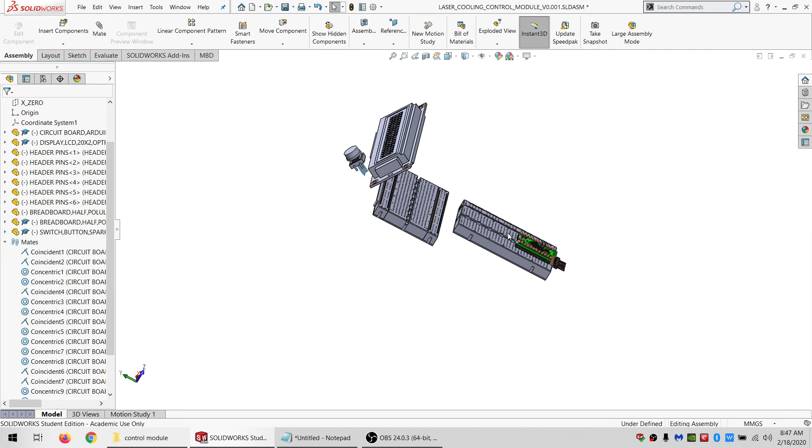I'm in the process of adding active phase change cooling to it, and that involves a whole bunch of extra sensors and readings I need to display. So I'm going to make a module to go on top of the machine that will give me all those readings, and it'll have a few buttons so I can control the menus.

I've already thrown in basically the parts that I want. These are breadboards, and this one is missing one side because I only need the one terminal strip. This one I'll do the same, and I designed this part in a previous video, so I can say I want just the J side, which removes that. So I've got two solderless breadboards.

And I've got an Arduino Pro Mini here. That is not an endorsement of this product, it's just that I have one laying around and want to get rid of it. It's hard to find a use for it, so here's the use for it.

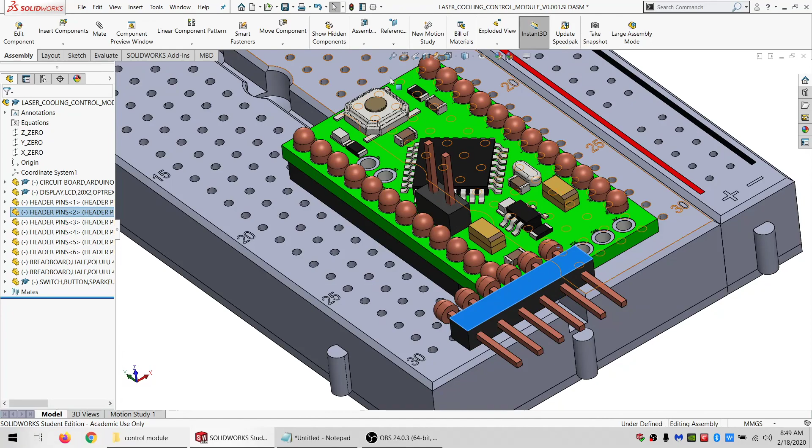I've got some header pins. Most of these are just concentric mates, so there's not much to it - I went ahead and did those before I started the video. This last thing though, normally I would design a 90-degree header for this, which I should probably do at some point. But the board I'm using is actually pretty old, and it uses an oddball 90-degree header that doesn't really match with what I've got, or what pretty much anyone has.

So I'm going to draw this in, show you how I made something like this into something like this. How I'm going to do that is I'm not going to edit this component, I'm just going to put a sketch on it.

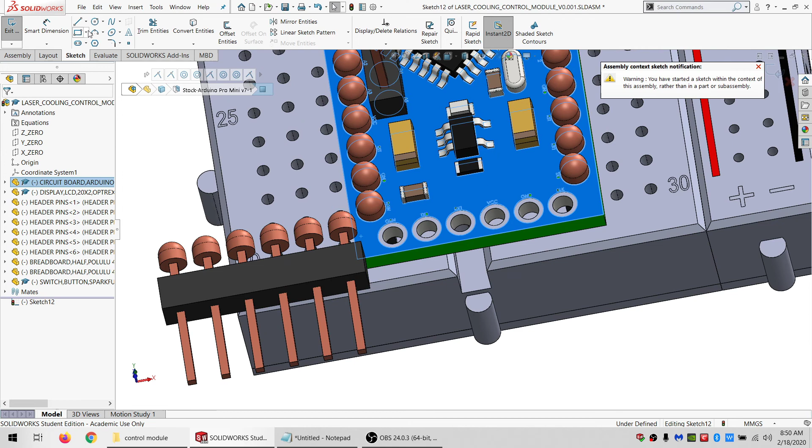I'm going to do a center rectangle here. I'm going to say this is equal to that, just because we want it fully defined. And look, this is a 0.62 width pin.

So we got that - select the point, select the face. No, we need to get out of the sketch first. So we want to mate using the face and the point. And that'll be kind of a slow update, but you hit Control Q and it updates.

In addition, we've got a button - there's actually going to be 3 buttons, but at this point it's easier to only have the one there. And we've got a character display, which is 20 characters across and 2 rows.

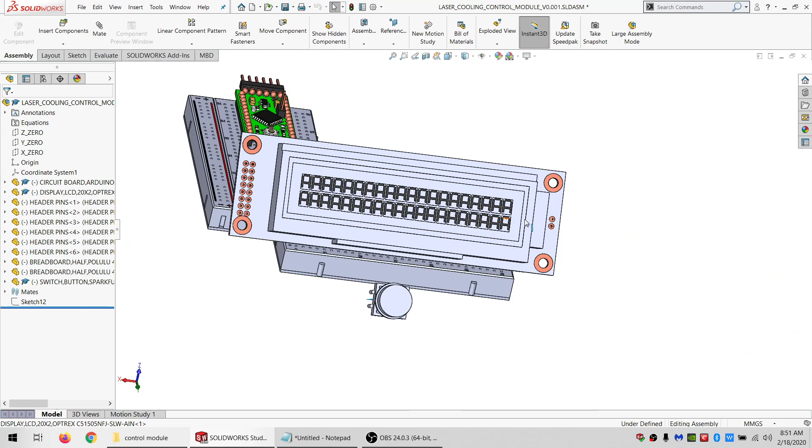So, best get started, basically mating all this stuff in space. I already have a couple of planes here to make it easier to set up, so I'm going to mate that so it's mated center.

And I'm going to go onto the Z0 plane, and actually I'll go ahead and make a couple mates right away on that.

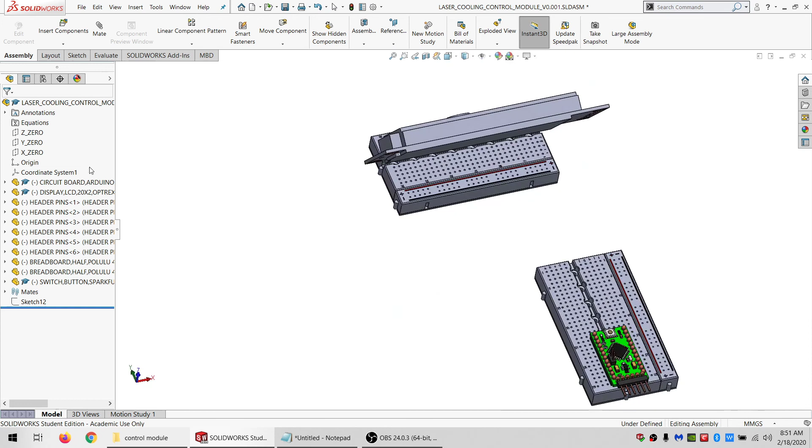So go on the Z0 plane and do another sketch. Just going to draw a rectangle real quick, do a midpoint with the origin. I took some measurements, so this needs to be 170 millimeters wide.

And there's going to be an access hole going into the bottom of it, which is 30 millimeters diameter, and it is centered 96 millimeters from the front, for construction.

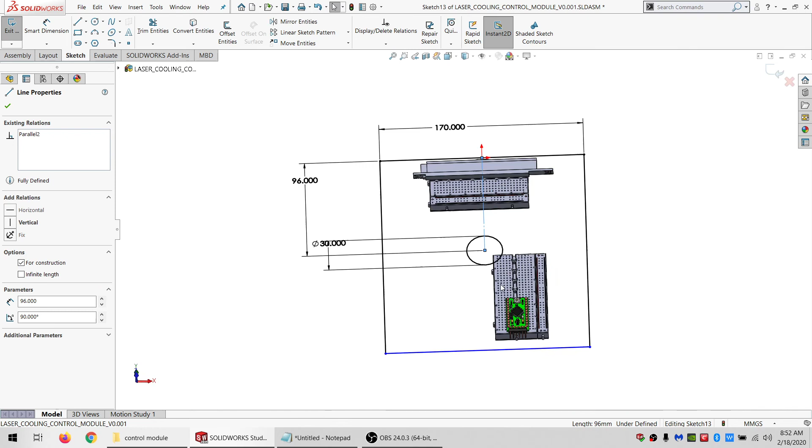And then, excuse me, we have this - we already have. Basically I want to start by figuring out how they're going left to right, then forward to back after that. So, see how wide this is.

So that is 82.1. I'm going to do a center rectangle, make it 82.1, and measure this way. Oh, that's 44.

And I'll just go tangent with this access hole, so it's not blocking it, but it's right up against the edge of it.

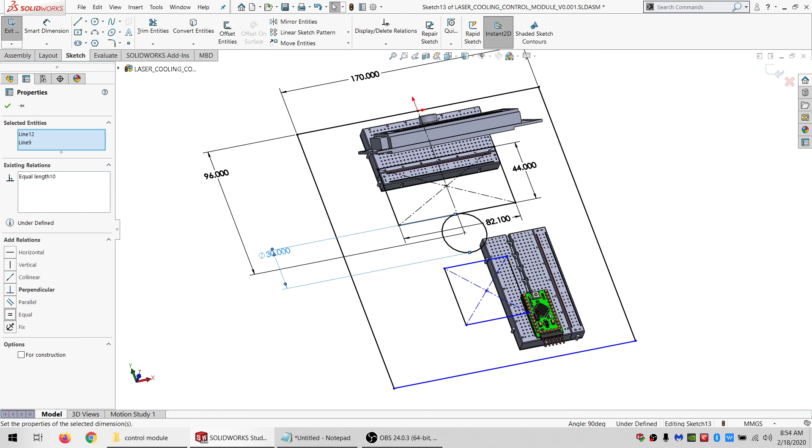And this is going to be the same as that, just rotated. So I want a center rectangle. Even though it's down here, I can still do a coincident with this line. Let's say this is equal to that, and this is equal to that, and this is tangent with that, and then that's locked down.

So based on that sketch, I'm going to go ahead and place a couple of mates in. So I'm going to click here and here, and here and here, and here and here.

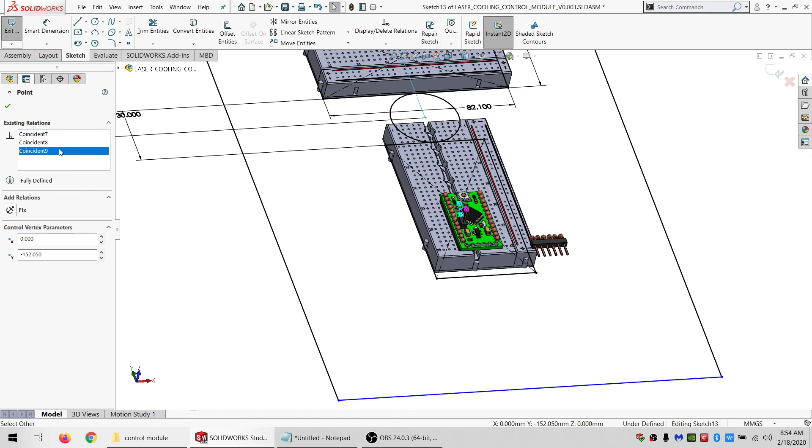Actually that's not quite right. So this, I actually don't want this to be centered, this rectangle, because I want this connector to be centered.

So let's make a little modification here, and let's see. I can't directly control this because it's already controlled by another sketch. What I can do is get out of here, do Control Q twice just to be sure, and then measure from here to here - it's 11.19.

Oh, I want to edit this sketch, and make a new thing, or let's see, 11.19 from the edge.

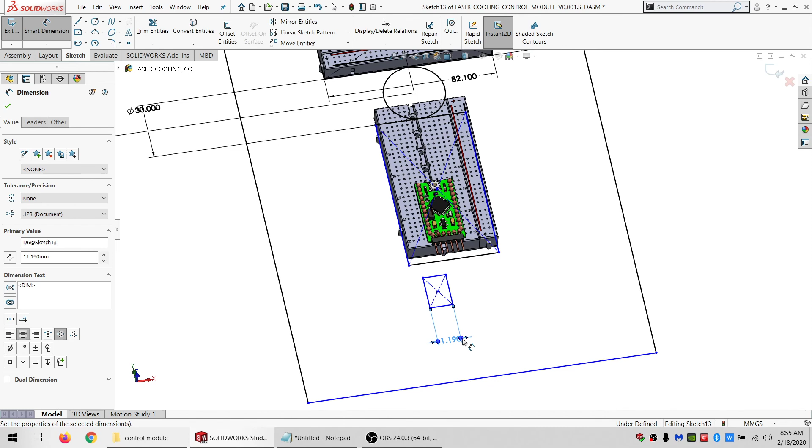And then make another rectangle, 15.2. Put coincident on that. And put a coincident on that. And go ahead and make these equal just for good measure.

It doesn't really matter where these are, but I do want them dimensioned at least so they're not floating around. And I'll do an equal there as well. So then this should be the edge of that. That should center it.

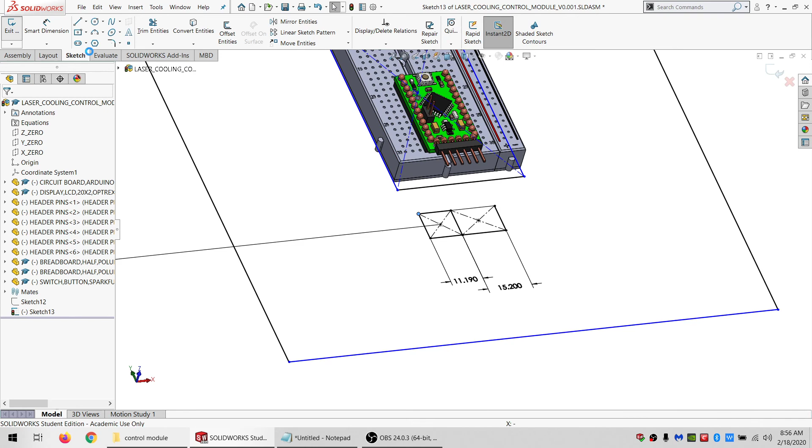And still want this to be there. Let's see, use this plane as a parallel. And do a Control Q real quick.

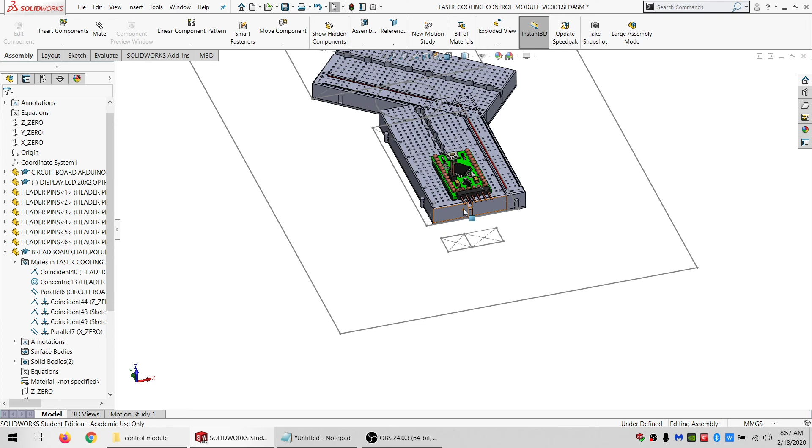So it's not happy about one of those constraints. Get rid of that old constraint, and it should be good. Do another Control Q just to be sure.

So that breadboard needs one more thing constraining it. So I can go from here to here and do a mate. So that one's locked down.

So now the only thing that's not locked down are the display and the switch. Before we go any further, I just want to double check that we take our center to there, 7.6. We take our center to there, 7.6. So that worked at least.

Next, before we can position this, we kind of need to add another feature of sorts. It's going to be a new part. It's actually not going to be made. I'll give it a name right away. Let's call it Keep Out.

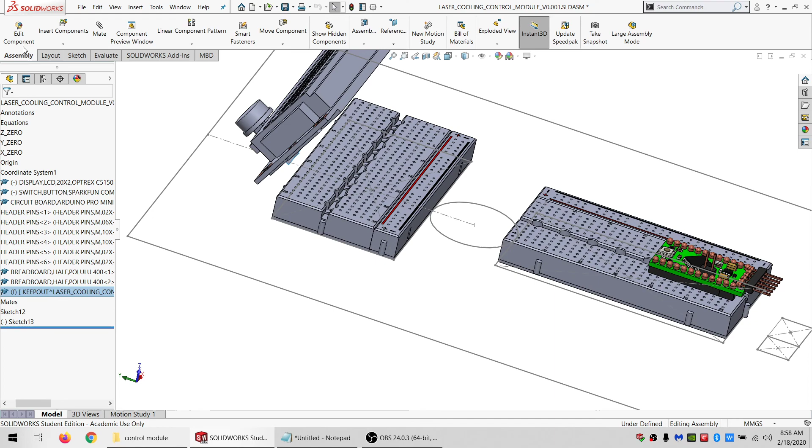And this is the area where I want to avoid putting anything because it might get in the way of components that plug into these boards. Because I don't necessarily know what components will be plugging into these boards in the future, because if I knew that, I could just make soldered circuit boards and be done, but things change.

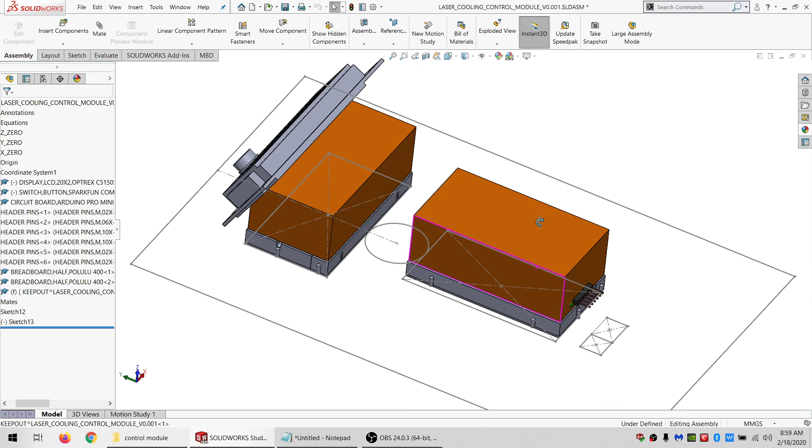So basically just cover the whole board, do an extrude, give it a color, so that's nice and easy to notice. And there we go.

And then I'm gonna put a mate on this display to set its angle of, no, I want an angle of 30 degrees. Basically this will be right up against the back of a piece of acrylic, and so will this part of the button, so might as well get those done right away.

And then this has a plane right here, and this has a plane right here. I'm going to mate those up so that's centered.

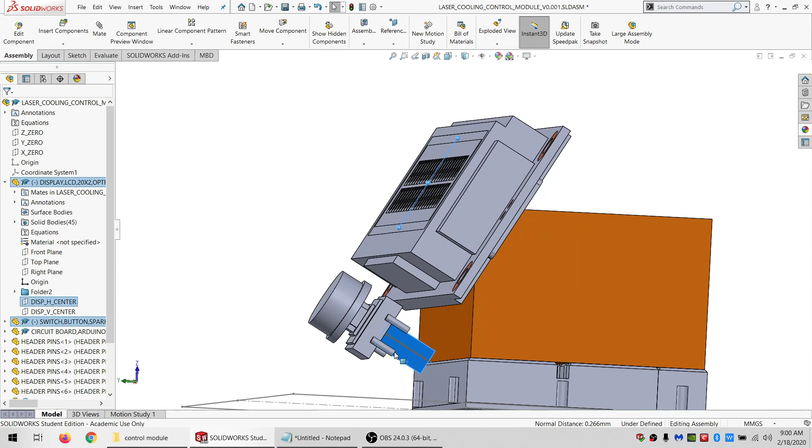And I'm actually going to modify this a little bit, because I'm going to have to give up a little bit of space if I want this thing to be remotely compact. Basically the back half of this breadboard I'll focus on. If I need taller components, I'll put it in the back half. Shorter ones would be in the front half.

And put that to the midpoint then. Do an extruded cut through all. And close that. So then that gives me a little bit more clearance room there.

And this positioning of this button is going to be tricky. It's probably going to be like one of the last things I do. But I do want to make sure that it's at least a good distance away from here.

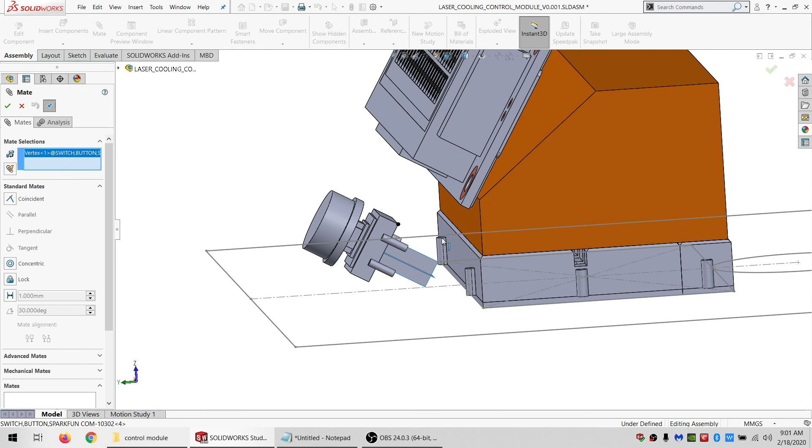I already had some selected. So I'm going to mate like that. Give it a distance of, say, probably need at least 12 bare minimum.

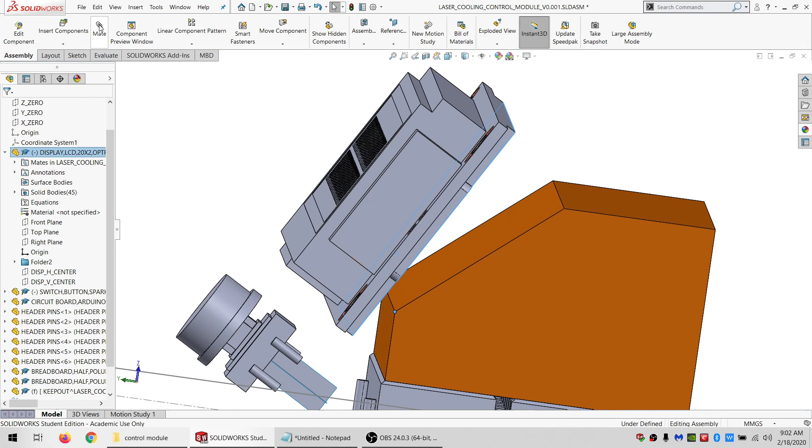So this can still move up and down, and that'll be something I have to figure out later, but I want at least a little bit of safety margin there. And then this can move up and down as well, or forward and back. So what if we put a constraint there?

Then it can kind of slide, but that's its last degree of freedom. And this is apparently fully defined. And that's no good, that's way too low. A bit too low, so I'm going to get rid of that mate.

So that we can actually have that high enough. And you want the bottom of this to be clear of the bottom here by, figure, at least 10 millimeters. Which will probably lock this down entirely. And that is fine being as a fix.

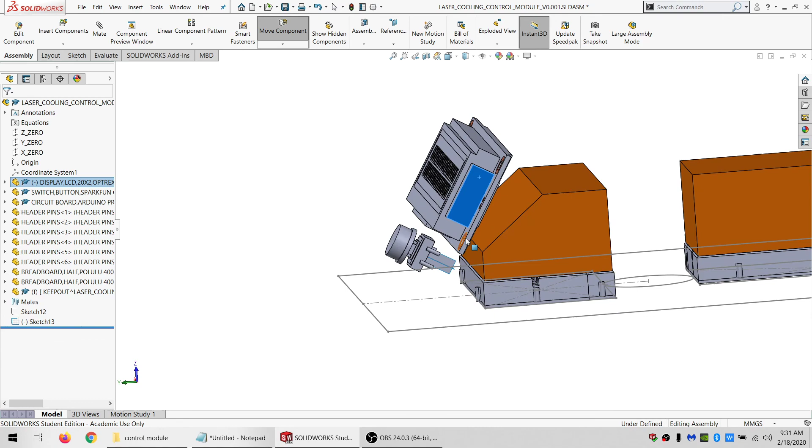So then this is the only thing that's still really moving freely. And I need to think of how I want to deal with that. I think if I put a sketch on here

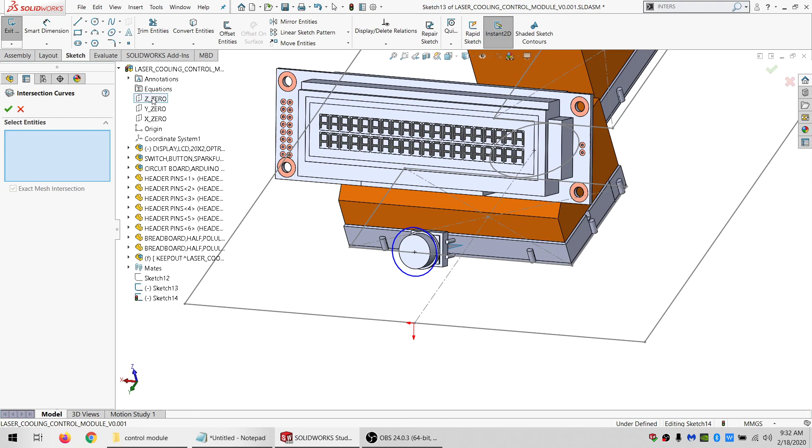And make those concentric, and I make, well, let's do an intersection curve. Oh wait, I don't have intersection curve there. Okay, it does not want to do an intersection curve, fair enough.

Let's draw a line. It really does not want to cooperate. At all. Alright. So how to deal with that? Seems like every method it's blocking me. Right.

That's not going to work either. Alright, let's put a sketch down here. Or actually, let's edit this sketch. No reason to add extra stuff.

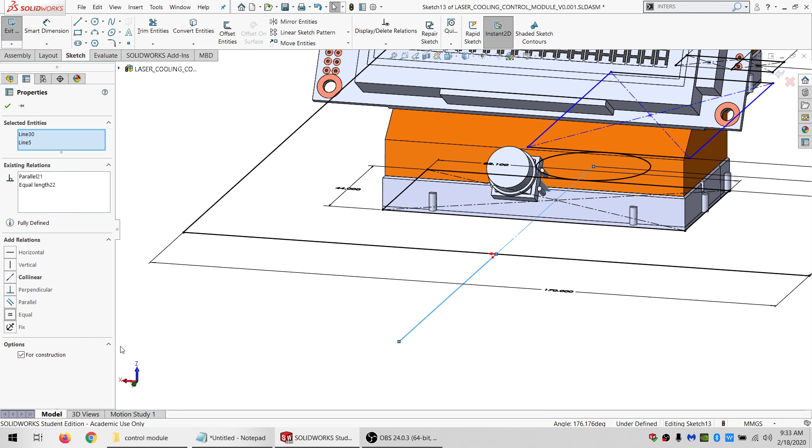These parallel and equal. Make this for construction. And edit this sketch again. Put a point and make it pierce, so that point is finally set. And this be horizontal. Alright, so that gets me what I've been trying to get.

Do a tangent. And... alright.

And then I want, let's see, this is the part that will actually be lit up. So that's the only part that's actually going to be seen through the screen. So that's the part that I want to mate to.

And do a Ctrl+Q. And everything is in its place. So I'm going to hit save. And looks like we're clear there. We're clear there. Alright.

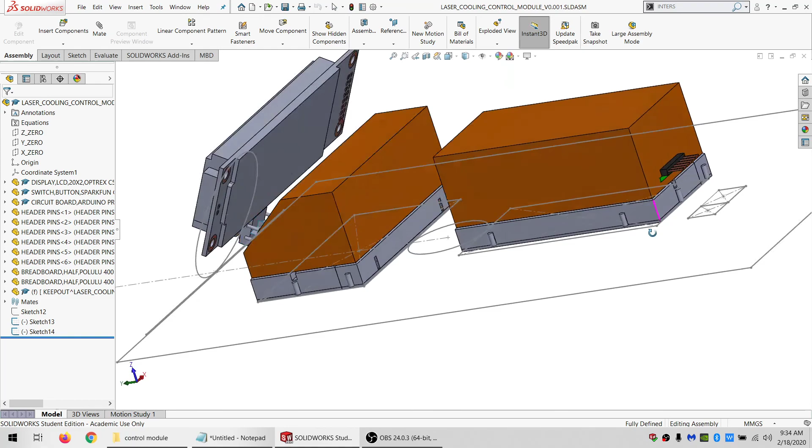So then I'm going to put in a new part again. And I'm going to select that part and click, actually, before I do anything with it, I'm going to float it, grab the origin, the assembly origin, and mate those together, since I don't like fixed parts when I don't have to have them fixed.

So edit this component. And we need to start putting in, basically I just want some surface bodies, and I can work from there. I'm going to sketch on here and just draw a rectangle.

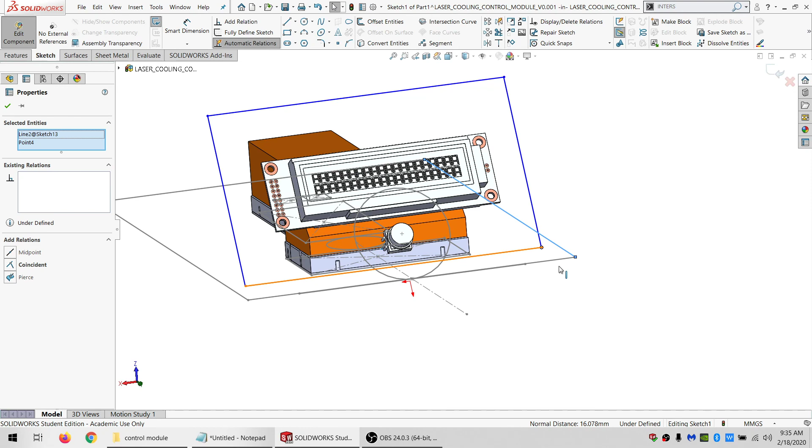Say it's, well, I'm going to make these surfaces a lot bigger than they actually need to be. So grab that, put a point here, not a midpoint, because I want it to be able to slide easily. Pierce that as well.

Yeah, way bigger than it actually needs to be. I think that's fine, just kind of guide surfaces. So, and then grab a planar surface.

And let's see, let's edit the sketch again. Just add that circle and that rectangle. So I've got those holes there.

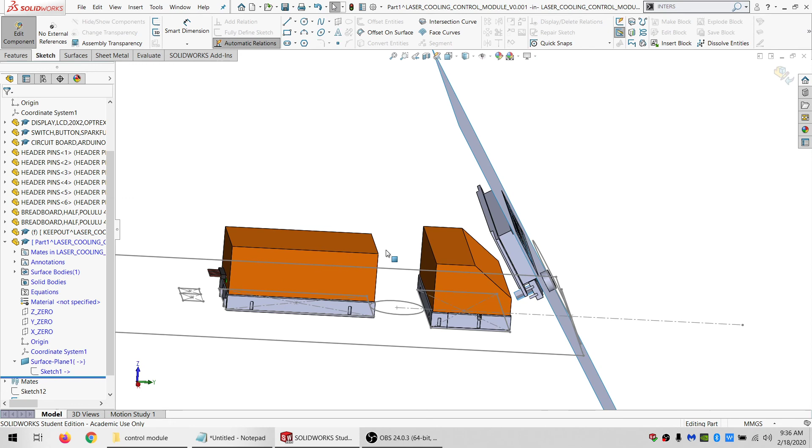And let's see, we need bottom, sides, back, all that good stuff. So draw on the Z0. And just basically copy this rectangle. Make another planar surface.

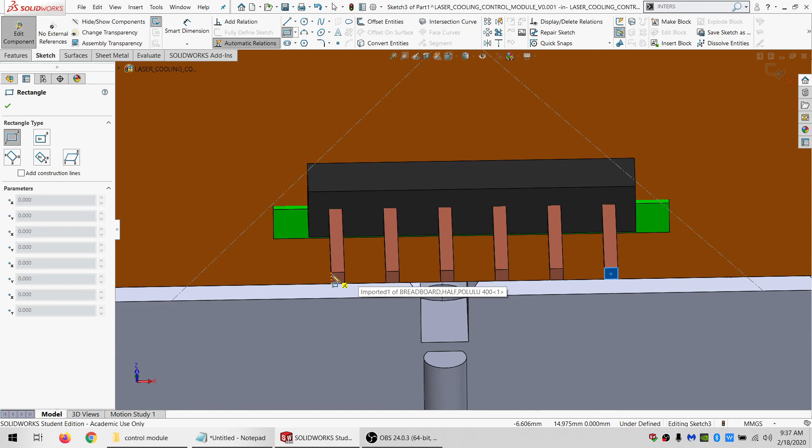Alright. And then back here, I'm going to draw right on there. Sketch. And first of all, I'm going to convert this hole back here, or this rectangle.

Do it for construction. Offset it by 4, I think. Gives me plenty of room to work with, because I want to put a fillet of 2 on there.

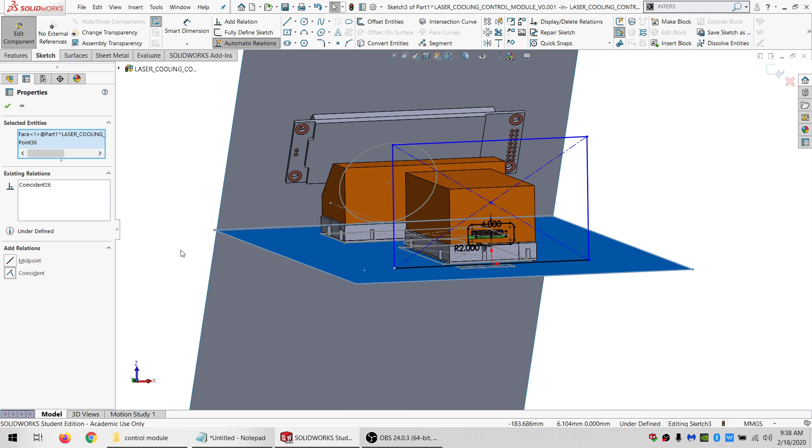And then I need an actual bona fide rectangle. So grab that plane so I can center it. And I can go onto this face.

Then the height and width are kind of mysterious so far. So we'll just make them bigger than they need to be and deal with trimming them later. So, planar again. Alright.

And now I want to make an actual plane. And it's going to be going between here and the highest point, which I believe is here. I'm not sure if that hits. Nope, it doesn't quite hit. Alright, so draw that plane in.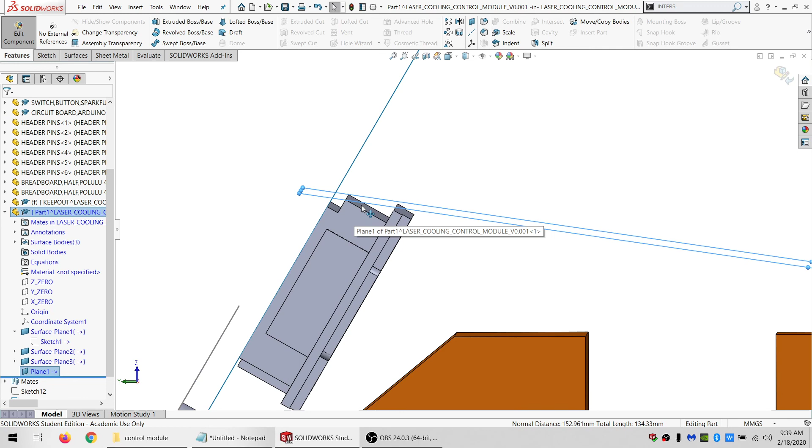And want a little bit of, well, do I want a little bit of space there? Yeah, I think I am going to want some space there. And the reason is, actually, let me get rid of this plane. The reason I'm probably going to want some space is I've got these letters, and it's going to be something like this.

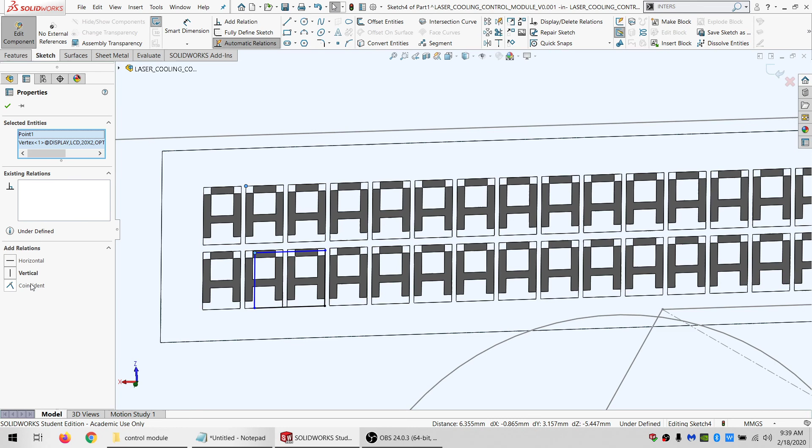Well, basically I'm going to have a bunch of little sections of this display, and they need to be labeled. Let's draw one in for now. And so it needs to come outside of the display area. Then I want a little bit of a safe distance. So do coincident to the edge of the display area.

These are both, these are all parallel. And I want, say, 2 millimeters of clearance. Then I want a couple of rectangles. And I want that midpoint. Do a midpoint to midpoint and make it parallel here. Parallel.

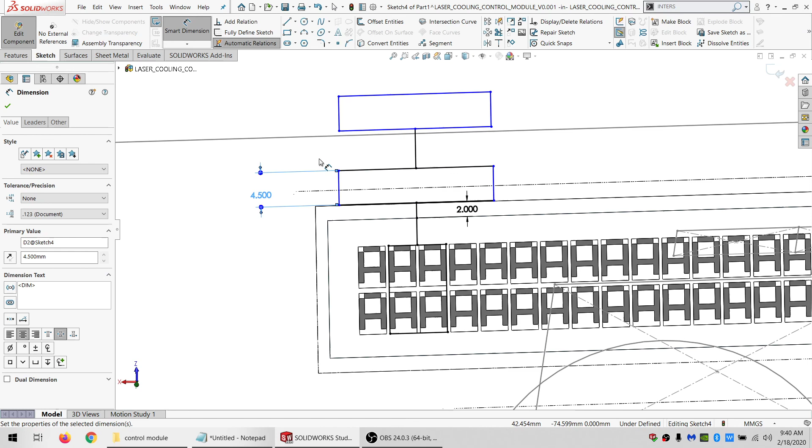And I want it to be, the text is going to be 4.5 high. And because it's about as small as I can get away with while it's still visible from a distance, from a little bit of distance at least. And that means that I'm going to want about a third of that, so that much spacing. So I need that much room above. Let me double check that I've got that much room below as well.

So make these all parallel with that. Make these equal. A couple of rectangles. Go midpoint, and midpoint to midpoint. Make these parallel and equal. Make these equal and these equal.

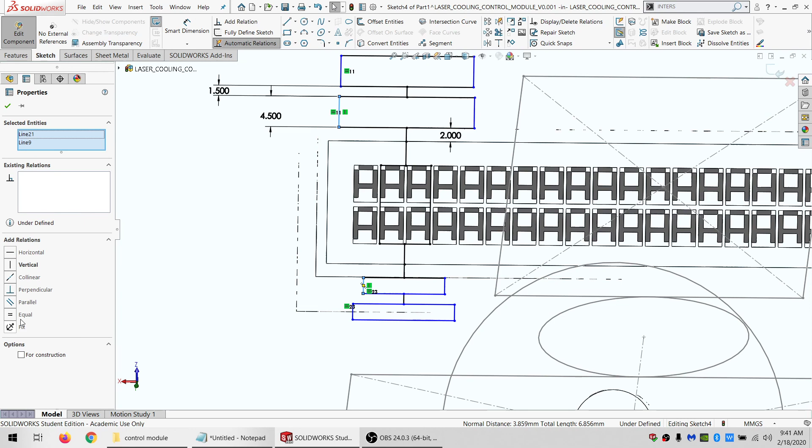And if I drag this way out, still pretty well clear of the button. So I need the inside to be above this, and probably want it to be above it by that much, just for cosmetic reasons. So let's go parallel and equal.

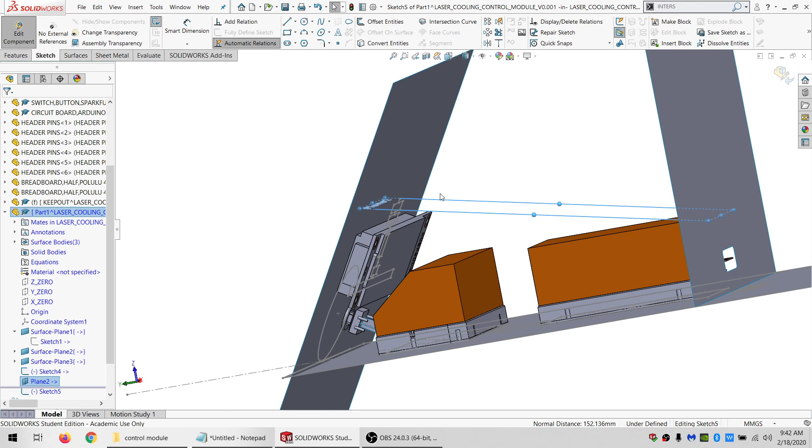And then to make the plane creation a little bit easier, you gotta go, actually no, that don't even need to do that. Let's get out of the sketch. And I can take the plane tool, grab this edge and this point, and we're fully defined. And then I can sketch on that plane and pick these two, say intersection curve, and then draw a line to connect them, so make it a rectangle.

Again, all these are like the inside of the material, so it'll all be going outwards from where it is. And yeah, that makes me wonder how much space I actually have right here.

So 4.2. So we're pretty tight right there. That's a bit of an issue. So I'm gonna get out of here.

And let's see, how did I end up locking these down? I ended up locking with this, I believe. Yeah. So let me suppress that.

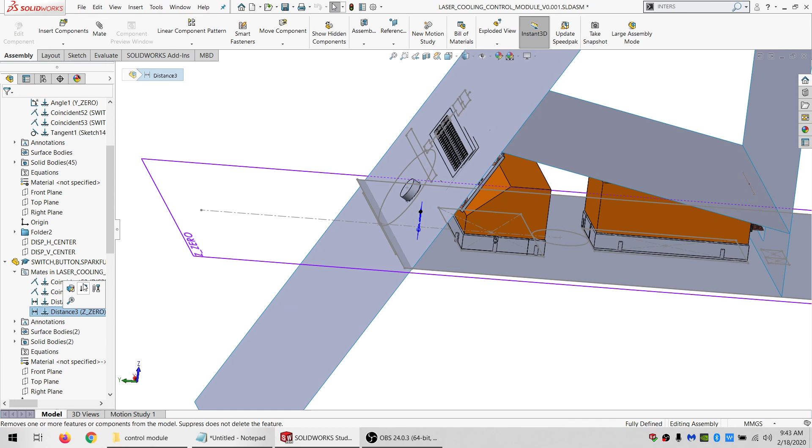And from here back, I want, so from here to here, I need, let's see, figure at least 4 in front of the material. And just for safety, I'm going to give space of 3 for the material itself. So 4 plus 3 is 7.

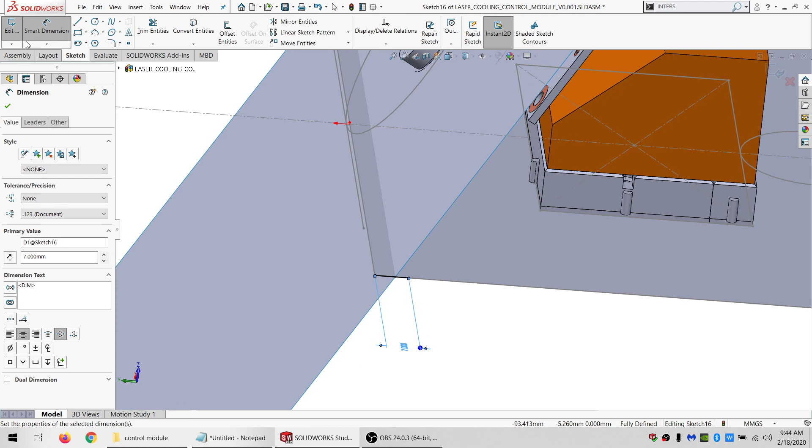All right. So I want to make a new plane. And this is going to be related to this by being angled 30 degrees.

Actually, this sketch is pointless because I have this old sketch here. So let's just offset this one line by 7.

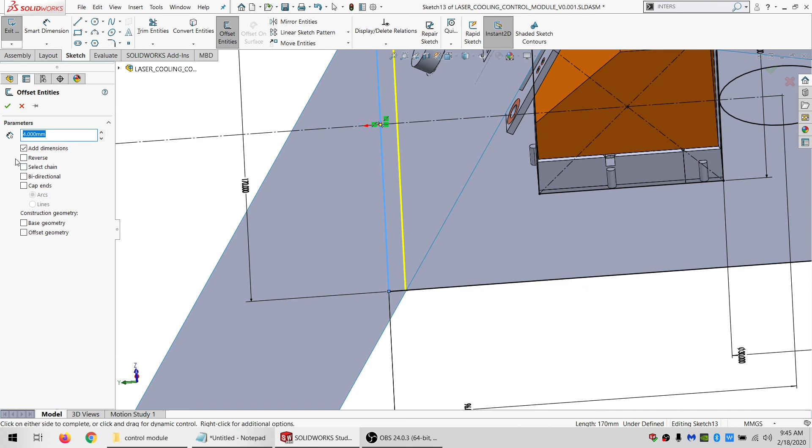Then I can take a plane. I want it to be coincident with that. And I want it to be angled from that by 30 degrees. All right, that works. And then I want to grab that plane and say that it is coincident with that.

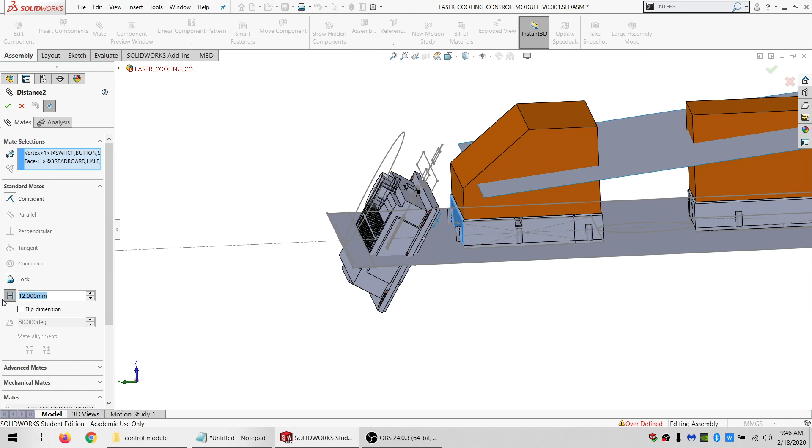And that is not ideal at all. Alright. What can I do about this then? I can give this a little bit less space behind it. That's one thing I could try. Cut it down to maybe as low as 8.

And yeah, everything's kind of turned into a mess now. Let me just suppress this for sure. And let's get rid of this angle.

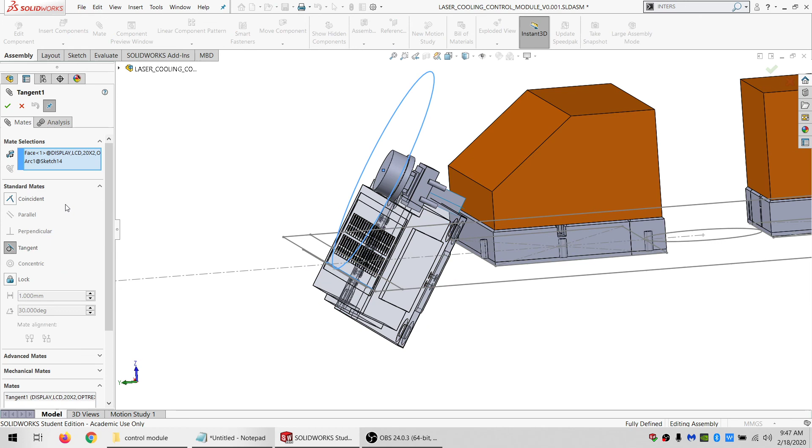And that tangent got flipped. So let's try. It won't even let me flip it. I just have to delete it and recreate it.

Alright, it's not happy about this. And for some reason that pierce point is bad now. But if I recreate it, oh, because now it's in there. That's fine.

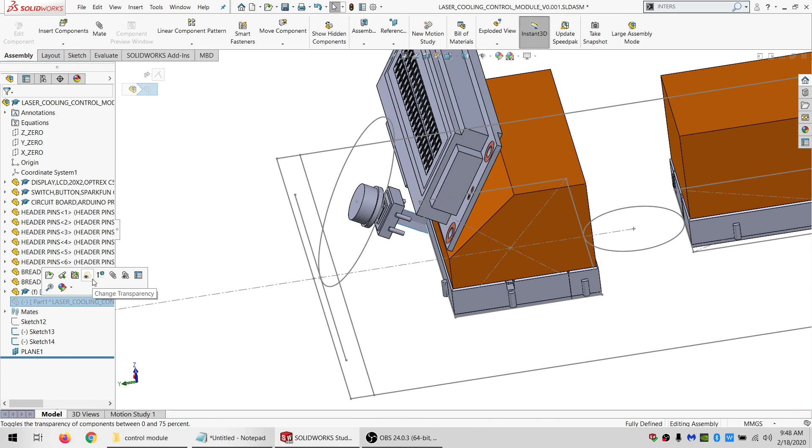Alright, then I can zoom way in here, grab this face, zoom way back out, and give it a tangent mate. Okay, disaster undone. Let's see if this comes back to life. Seems to have. Alright, let's save this.

And then we need sides. And since this is kind of rotated, and I've already got an angle here, I'd like to kind of angle it in towards the back as well. Let's edit this component. And it's going to start from here.

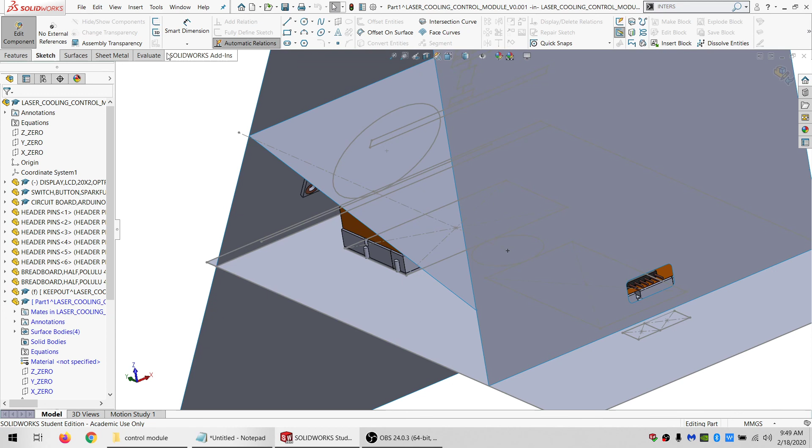Let's do a 3D sketch. So it's going to start from there. And then it needs to come in, and it's going to be close to this. Actually, I think it sticks out more on this side. So it's going to be close to this, but I want a little bit of wiggle room.

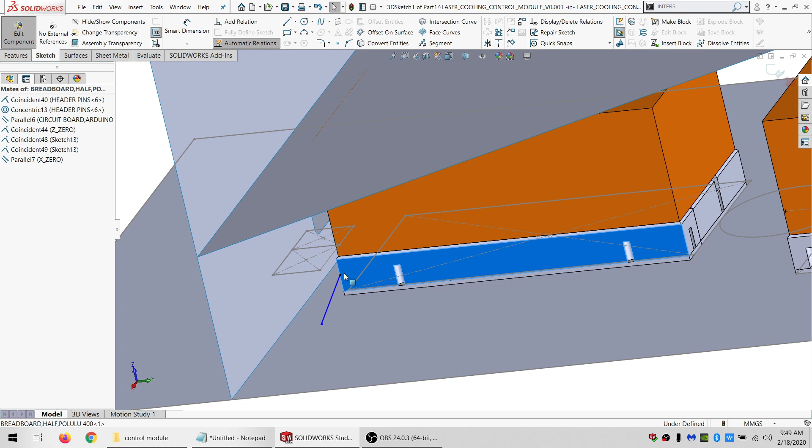So how I'm going to get that is I'm just going to draw from there. I'm going to say this is perpendicular. Oh no, I want to select the face and make it normal. And then I'll do dimension to that face. Just say 3 millimeters, not a whole lot of wiggle room, just enough to make things a little bit easier to fit in there.

And then, so I've got a point and I've got a line to work with. So I'm done with that 3D sketch. Make a plane, and it's going to be from this point to this line.

And I just need basically drawing a big old rectangle, and we can trim it later. So just go double equal, dimension it to be say 700, and do a planar surface.

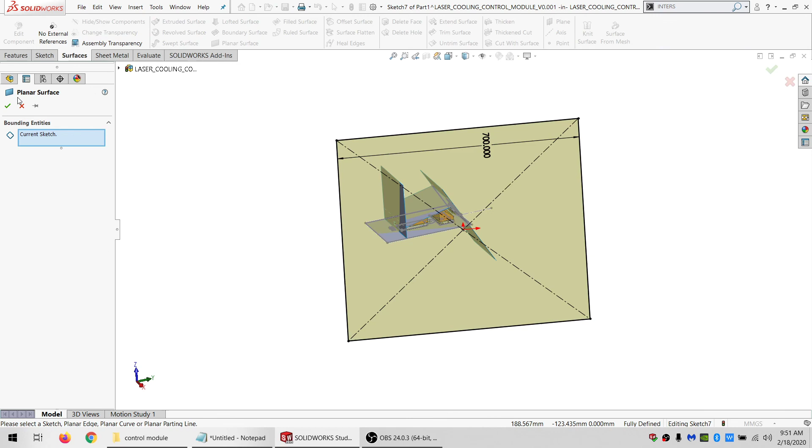So that is the basic gist of the outline, or of the shape. So let's hide some of this unnecessary or stuff we don't really necessarily need to see anymore. And mirror this. Oh. Let's mirror this across. So that's all closed up on all its sides.

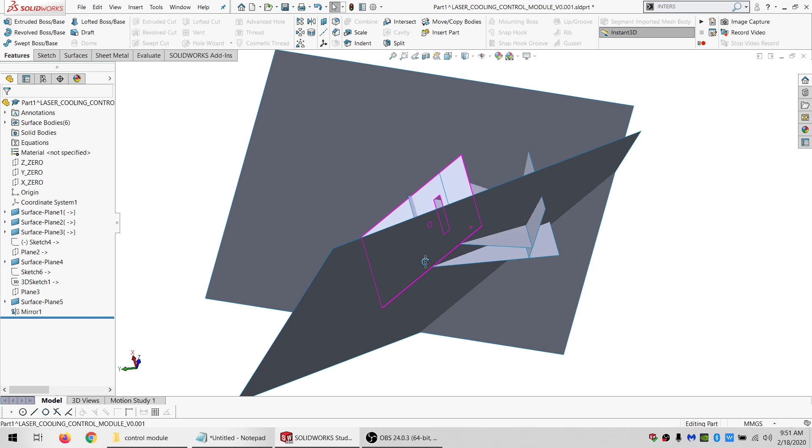All right. Then we can do some splitting. So let's trim this and this and this. Oh. Use those trims to trim this. And yeah, I'll just select them all. I can delete them after.

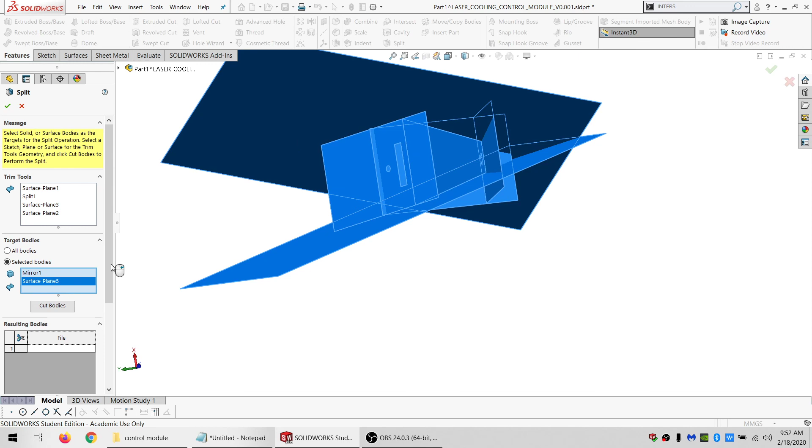All right, and then do another split. I want to use this, this, this, and this to split this and this. So that's by itself, that's by itself. And then we got that left over and that left over.

All right, let's do another split. We want to use this and this to split this. So let's hide this part. Then we have that and that left over.

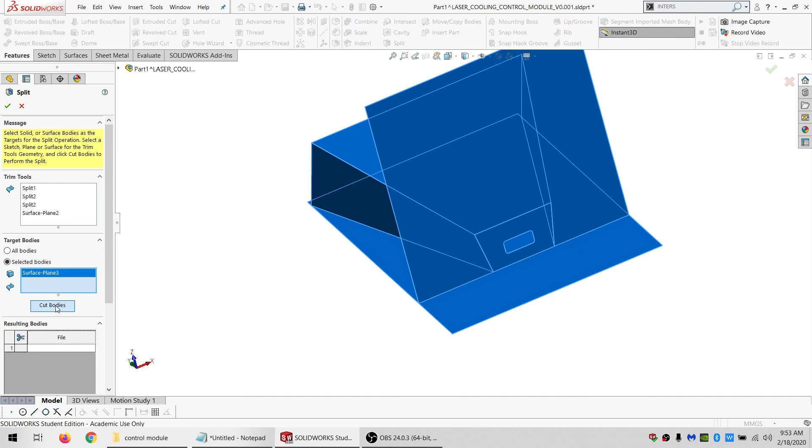And then we need just a little bit more splitting. So I'm going to take those, and that, use it to split that. And this is the part I don't want. Alright.

And I can leave this as it is for now, it's not really getting in my way too much. Also, this is a virtual component right now. I'm going to make it not a virtual component.

Do a save. Open, file, save as. I don't know why it's doing that. But there, now it's not a virtual component at least.

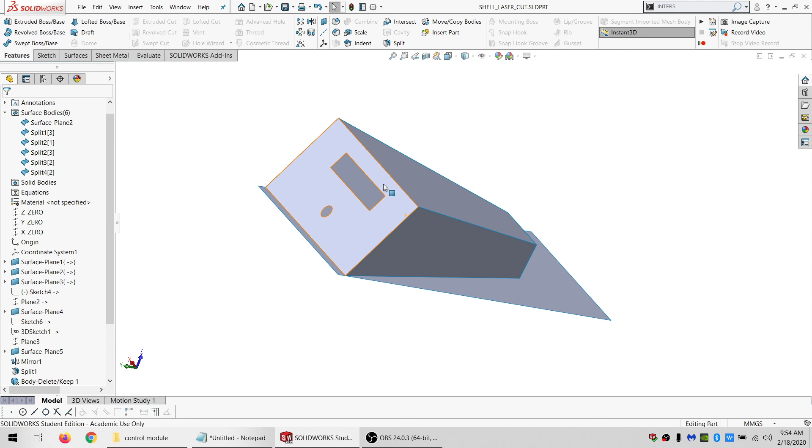And let's see, from here, I think it doesn't matter how much my material changes as far as thickness of material and such, these things here are pretty much just going to stay the same.

So with that in mind, and because I don't want to run into a whole bunch of problems with saving later, because SolidWorks sometimes freaks out, I'm just going to basically trace this as a shape in space.

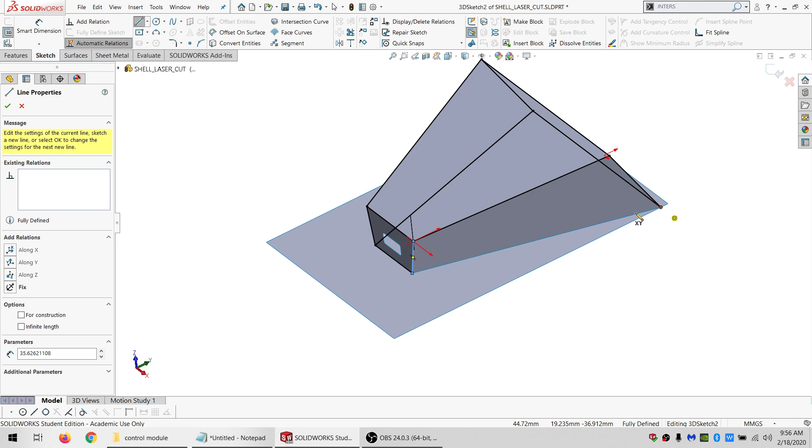And just grab every edge, put a line over it. And convert this, that. Convert this. Convert that. Alright, so now I've got basically just lines to represent everything I've got.

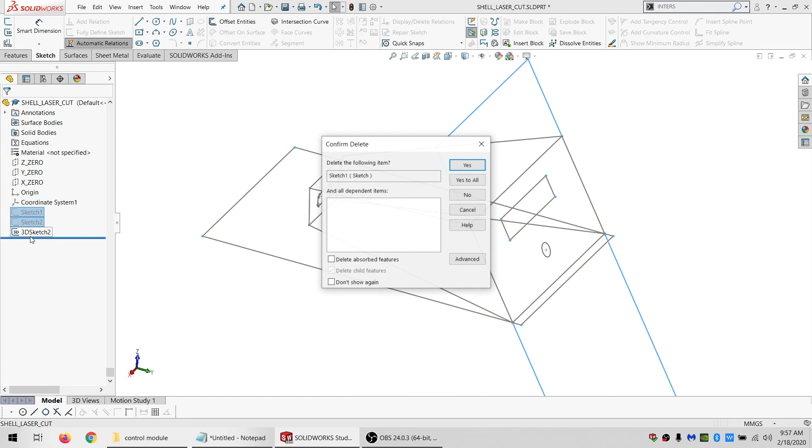I'm going to go to display, delete relations, and delete all. Then select all, and I'm just going to fix them. That way I believe I should be able to just suppress everything that came before there, and those remain, which means I can delete everything that came before there, and then that way I don't have any external references.

So let's save that. And let's see, I'm gonna want to put these back in now. And so grab this, and this, convert.

And do a filled surface, even though it's planar, I can still draw on it. Actually, I can't. Well, that's annoying.

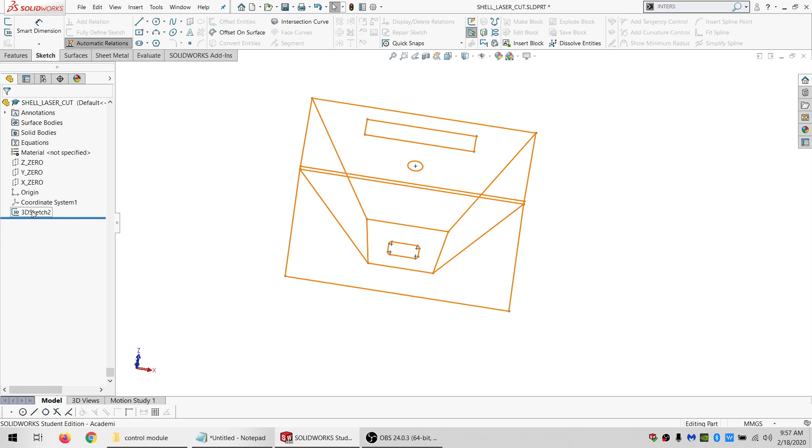Alright, well let's select this and this. Actually, in my 3D sketch I'll go ahead and put the planes in there, save myself a little bit of headache.

So, got a plane, got a plane, got a plane at the bottom, got a plane at the back, got a plane at the front.

And so then if I say sketch on this plane, take those and this, convert it, planar surface. There we go. I can grab this plane, go grab these, convert them into a planar surface.

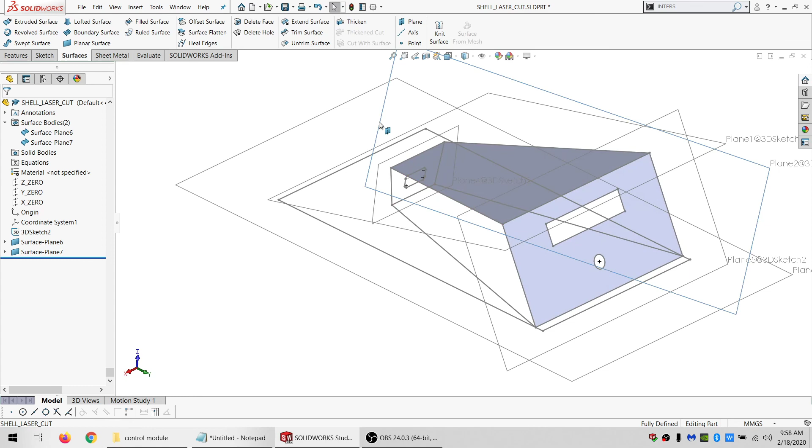Then, let's see, this plane. Let's grab these, convert them into a planar surface. This plane. Let's see, that, select chain, convert, planar surface.

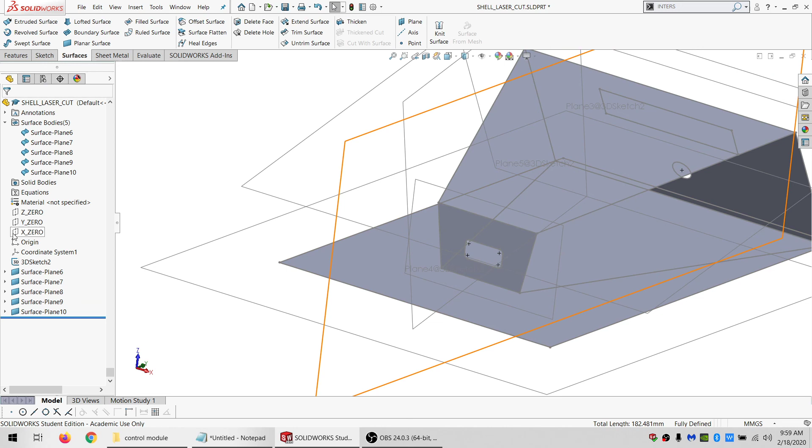Go in the back, and I want this plane. Select this chain, convert it, and select these, convert them, and do a planar surface. And I can then do a mirror for that last plane to close it up.

Then I can hide this sketch. And there, now we've got our base for everything without any external references to an assembly that is full of big parts and can give us all sorts of trouble when we try to divorce them. Right, so that's looking good to me as a starting point anyway.

And let's put in something here. That's just an approximation, even acrylic is not 100% accurate, although it's better than wood. I'm kind of tempted to do this out of like a nice wood, but I think I'm going to go with acrylic anyway.

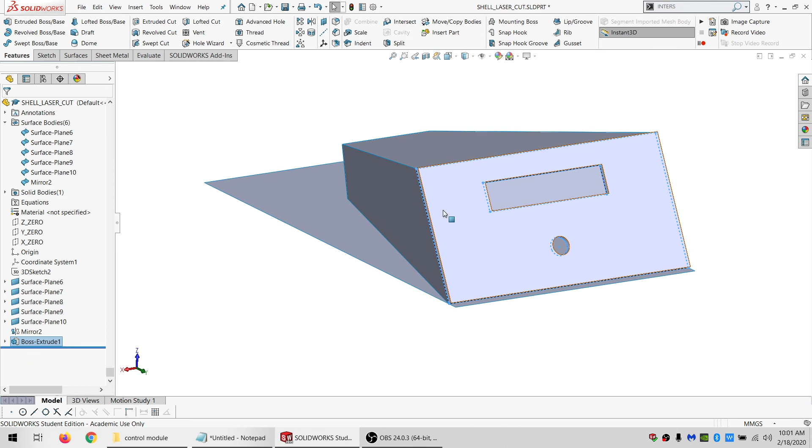So, gonna sketch in this plane, gonna convert all the inner loops, and convert those. So it's gonna be equal to material thickness. And gonna go up here, basically do the same thing, say this is equal to my material thickness. And I don't want to merge it.

So already we've got a little bit of fun right there, how it doesn't really interlock, and I want it to interlock. So think how I can do that. Think how I can do that. Okay, let's drop here.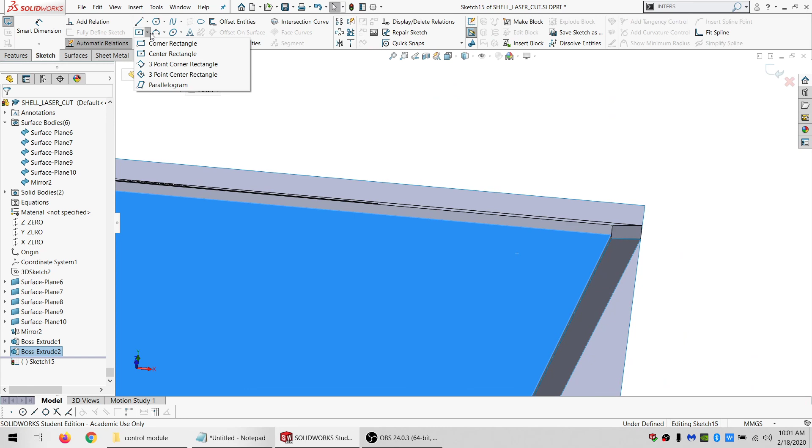Gonna make this in a line, maybe just 5 millimeters wide. It's pretty small, but let's go a little bit smaller, just make it look really nice and fine. Those equal. And I want this to be well longer than it needs to be. So let's select this chain.

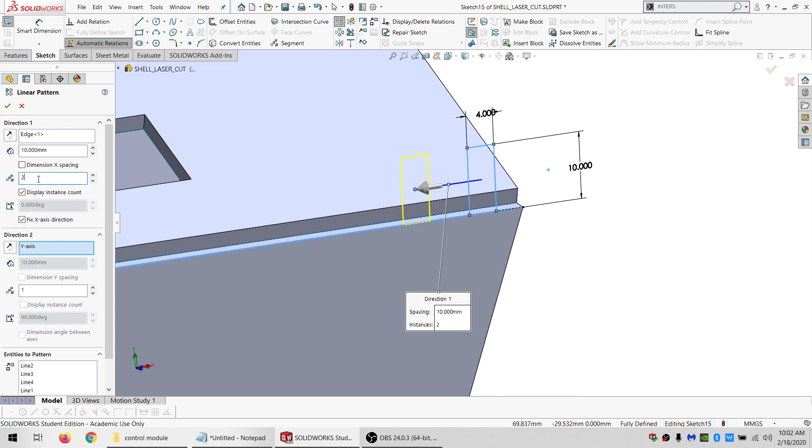Do a linear pattern following this edge. And spacing is going to be 10. And let's try 10, 20, 22, 21, 20. Okay, get rid of this dimension here.

And we want to put in another line just like this, just like at the other end. Say this is for construction, and it is also equal. That's for construction too. And one more line for construction and equal. So these end up being a little over 4, but not much.

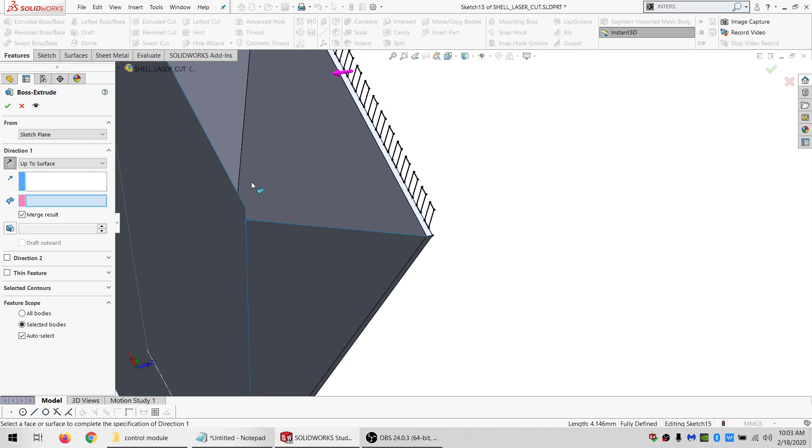Hide this for a second. And hide this for a second. And extrude up to here. And merge it. Bring this back. Oh, and bring this back.

So then, if I just sketch on here, and I do, just gonna put a circle right on the origin, make this like pretty big. Doesn't need to be quite that big, maybe. Do an extruded cut through all, going the other way, and only applying to this one part.

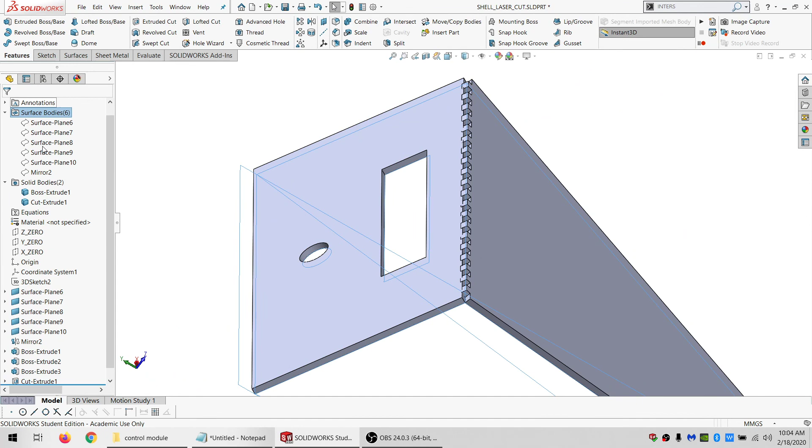And let me hide this, and hide this, and let's go normal to this. And I just want to cut off those because I can only do normal cuts. Go through all, applying to that part. Alright.

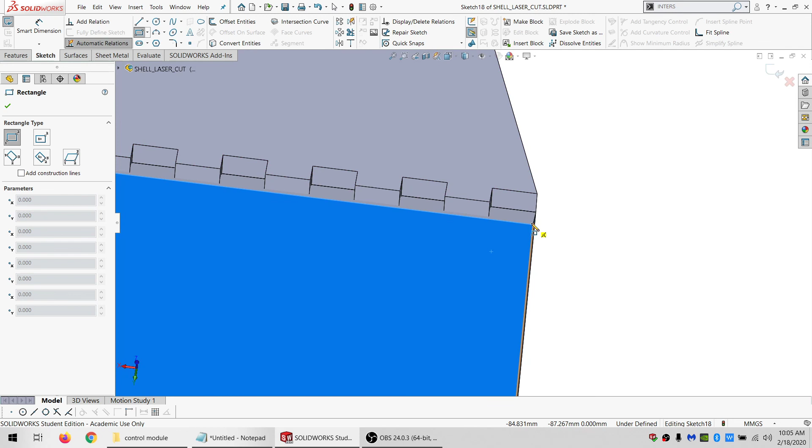So then this one kind of needs the matching opposite made into it. Yeah, that is kind of cutting in there, but we'll deal with that. It's not the most simple, get it done the first try kind of method. You kind of have to cut and use it to cut itself, and use it to cut itself, and so forth.

Do a linear pattern going along this way. I think I did 20. And coincident. Make that 21, I guess. And make it too long. And we'll extrude up to there.

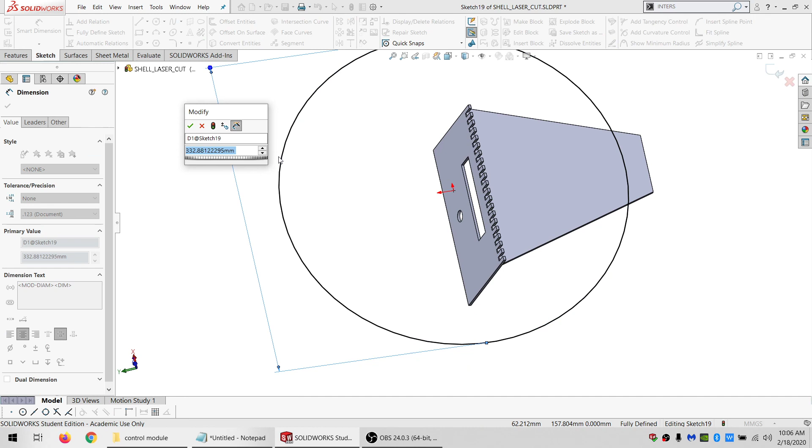Alright, same thing here. Gonna trim those off with just a rough circle. And hide that. Normal to that. Do a sketch to cut off the non-normal parts of this. All in there.

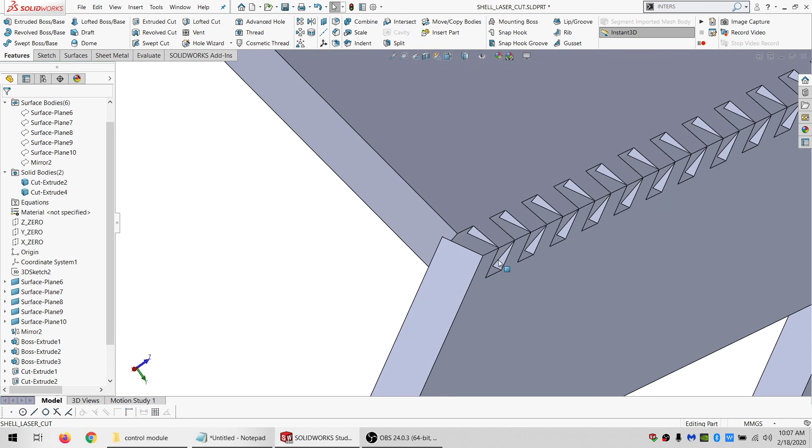Alright, so that's kind of matching up. Still going to need to do a little bit of cutting to keep the intersection away, but we'll come back to that, because I've got plenty more pieces to do here.

So let's see, this one starts with a gap here, so it should probably start with a gap in the back as well. But let me make this back panel first.

So let me convert the inside, convert the outside. Say this is equal to material thickness, and I don't want to merge it, and I want to go that way.

And let me hide this again. So these are going to link up together as well. So starts with the gap like that. So I figure I might as well just have starting with gap on both ends of the top panel.

And I started it as trying to be 4, so I'll again start this as trying to be 4 and adjust for it as needed. Make that for construction and equal. Make this 10.

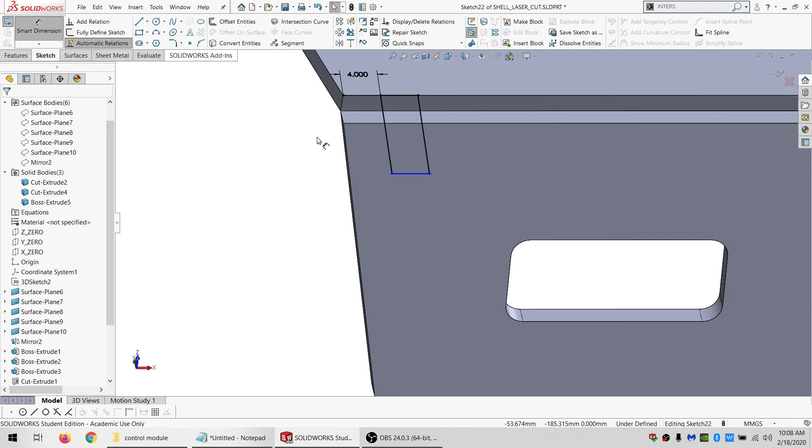Select this chain and do a linear pattern along this edge. 8 spacing, maybe 5 or 7. 7 looks about right.

Get rid of this dimension. And for construction and equal. And then one more line. For construction and equal.

And let's extrude up to here. And merge result with that. And I'll kind of do the same thing down here.

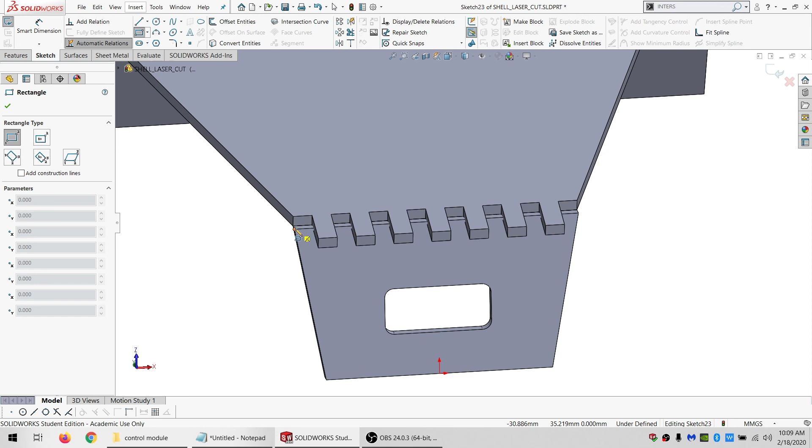And let's see. Well, let me just do that. Alright. Make these 10. I think I need to do a pattern of 8 this time.

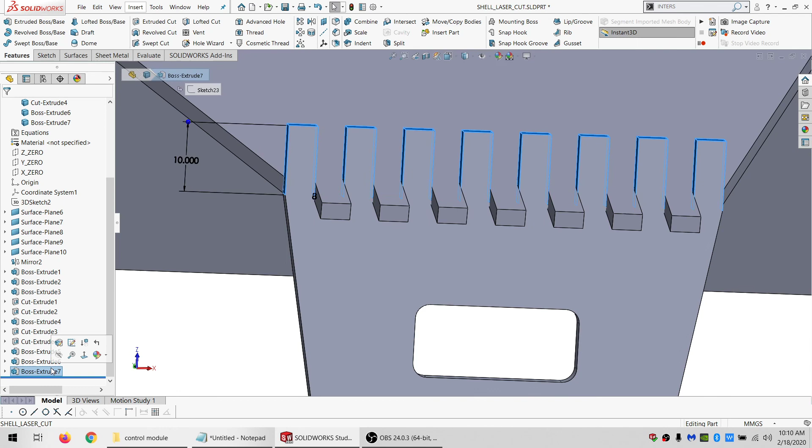And grab that and that. And go up to this surface. Alright, make sure it only merges with the one that I want. Yep. Alright.

Okay, so trim those down. And I can just pick a point. Make this 500. Do an extruded cut through all, going backwards, applying only to this.

Kind of do the same thing here. Go 500. Do an extruded cut through all, going backwards, only applying to this.

So there's definitely some interference there, obviously. We've got at least our basic tooth idea down. That's all I'm working towards right now, is just getting the idea down. Do the fine tuning afterwards.

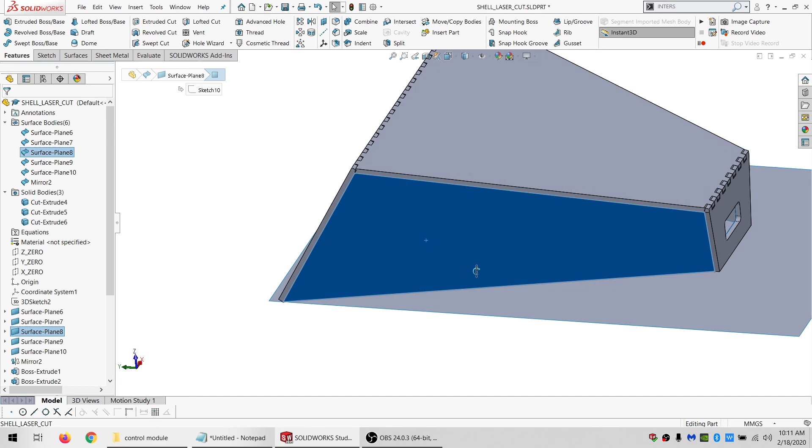So need this side panel. And see, we made this 170. And I think it's actually 175 we've got to work with, so that's okay.

Sketch on that, convert it, equals material thickness, result, and we want it to be going outward. Alright. And I might as well do this side too while I'm at it.

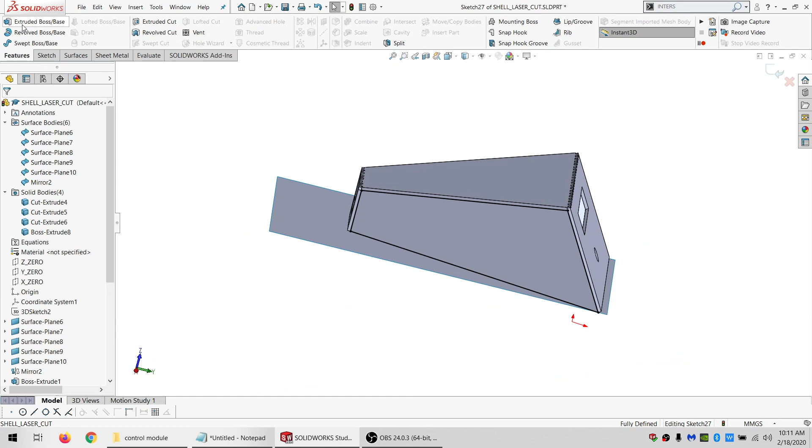Good deal. Let's hide these surfaces again. Need to do some linking in here. Take a break, be right back.